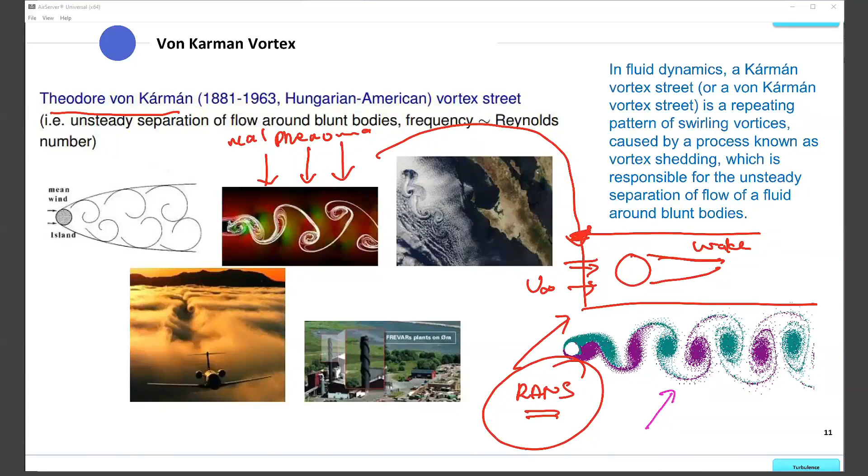I think it's quite interesting to see some quotes here. The first one is from Heisenberg, a German Nobel Prize winner in Physics in 1932. He said, when I meet God, I'm going to ask him two questions: why relativity, and why turbulence. I really believe he will have an answer for the first. Similarly, from Sir Horace Lamb, a British scientist, he said, I am an old man now, and when I die and go to heaven, there are two matters on which I hope for enlightenment: one is quantum electrodynamics, and the other is the turbulent motion of fluids. And about the former, I am rather optimistic.

So you can see here two very well-known scientists highlighted the issues of the difficulty of turbulence. There is no right answer or right explanation to the turbulence behavior up until now. We just try to understand it, and there is still so much to study about turbulence. That's why this lecture is intended to give you some perspective.

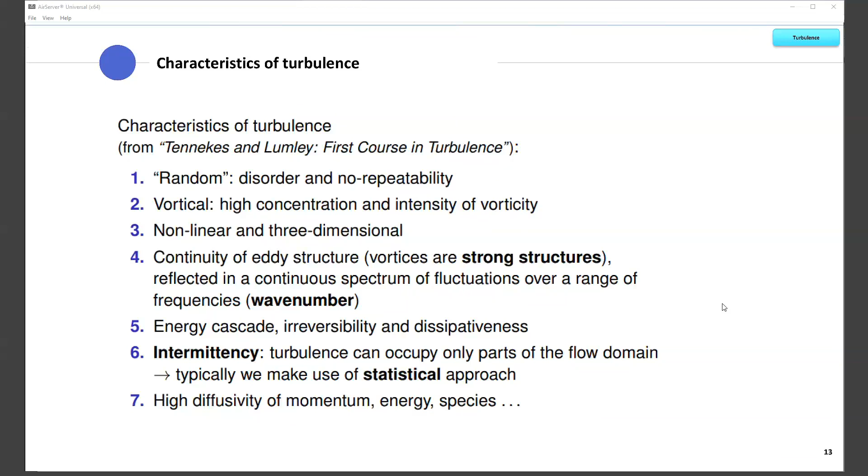For the characteristics of turbulence, there are several terms that I think are quite important for us to understand. First, we need to understand that turbulence is random, meaning that you cannot predict its behavior. It is disordered with no repeatability - it has no set or repeating pattern. So it is random.

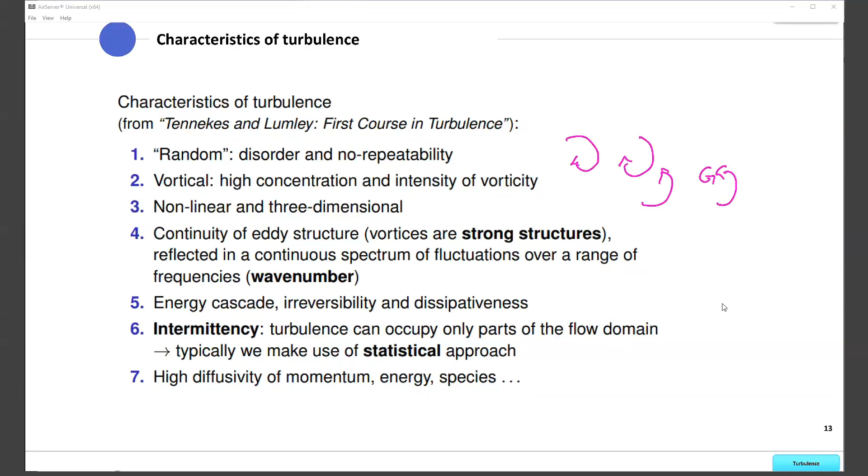Secondly, it is vortical, which is very high in concentration and intensity. What is vortical or vorticity? It is basically the swirling shape, or the swirling movement - these are the vortices, which can be big or small. If you notice, when we first started this lecture, we looked at this example here. You can see once the flow passes through an object, the mixing that happens is in terms of vorticity - the shape of the turbulence will be in terms of the swirling movement. So that's vortex or vorticity, the swirling movement.

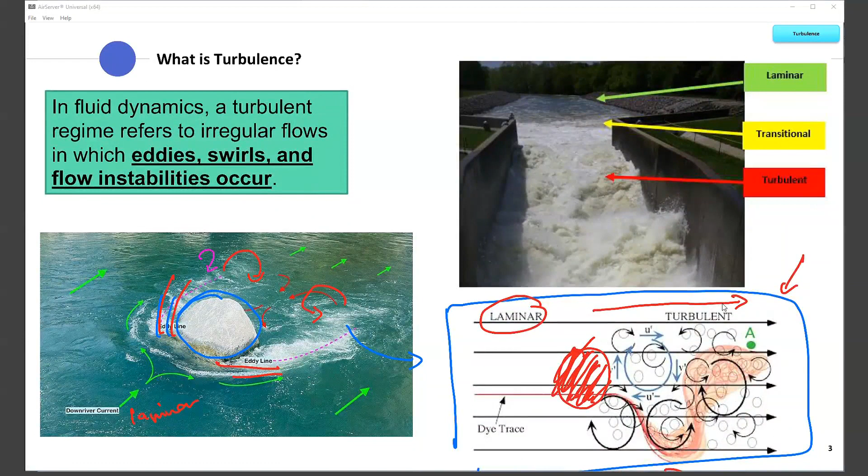It is also non-linear and can be in 3 dimensions. Just imagine, let's say we have position 1 and position 2 - we cannot expect the path of the flow from position 1 to 2 to be a straight line. So it is highly non-linear.

When we're dealing with the flow, you need to remember we are not just dealing with a 2D problem - it is a 3D problem. Meaning that if we look from the front view, remember when we did our labs 1 and 2, we created a domain for our problem, and the domain from the front looks something like this.

Okay, so from the front view we have, let's say this is our x, y, z. So we have x, this is y, this is z. So from here we can see that we have y, over here y, and this is x. That's 2D, but you need to remember...

If we look in great detail, the water column or the depth, we call it water column, can further be divided into several slices or layers. Each layer will have a different movement, or vorticity, the swirling movement, in terms of x, y, and z. So it is highly non-linear and multi-dimensional. It's not just 2D, it's in terms of x, y, and z.

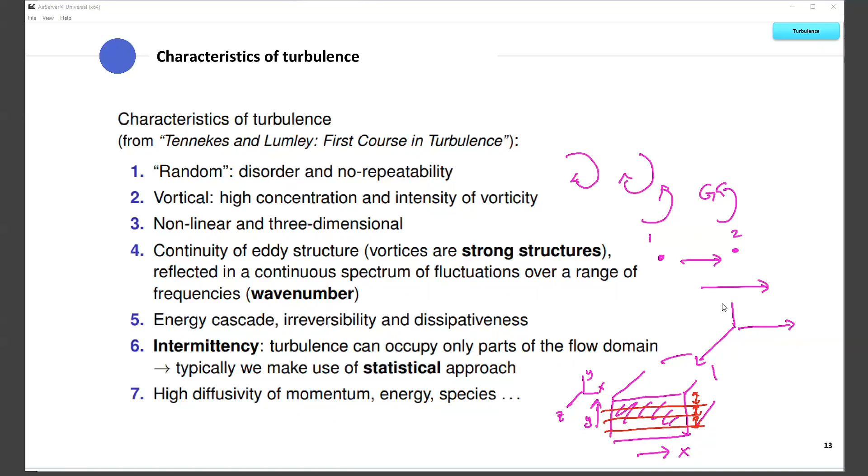And when we talk about turbulence, it also involves energy cascade, which we're going to talk about in a bit, meaning diffusion from large energy into smaller energy. It's about irreversibility too, going back to thermodynamics if you remember - there are things that once done, you can't revert back to the original position. And dissipativeness, meaning the loss of energy. So these are the things we're going to discuss about turbulence.

And then about intermittency, point number 6. Turbulence can occupy only parts of the flow domain. This can relate to, if I can go back to our first slide here.

All right, so if you notice on the figure on the left, the turbulence region - let me color them, let's use black. The turbulence region behind the object has a certain distance to it, meaning the turbulence will not propagate or be maintained over a long period. So this is what we want to discuss.

There will be energy cascades, energy dissipation, meaning the flow, after it passes through the turbulence stage, will recover to its original velocity. So if we have, let's say, 1 meter per second before the object, after a certain distance you will get again 1 meter per second. So this is about intermittency, meaning turbulence only happens at a certain region or location, and after a while it will pass through that stage.

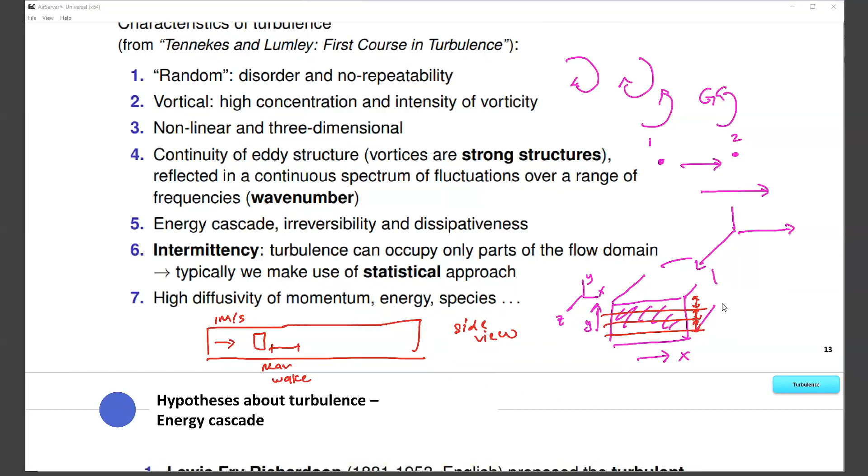So for my work, for example, if we are looking from the side view - this is our domain, and let's say we have our object here, similar to what you did for your second lab. Let's say this is the inflow velocity, 1 meter per second. In the immediate region downstream, behind the device, from here to here, we call this region near wake. How you characterize near wake, how you define it, is usually from literature between 3D to 5D. D here refers to the diameter of the object. So if our object is 1 meter, our distance will be between 3 to 5 meters, categorized as the near wake.

So the near wake is where you will have the highest fluctuation or turbulence. After this region, some of the turbulence will still persist, you will still have the characteristic of the turbulence, the mixing is still happening. So after the near wake, this is what we call the far wake region.

So far, wake region is usually defined as 5D and above. For my case, when I did my research, I was interested to find out how far it takes for the wake to recover. The wake here refers to, if this is our object, the turbulence, basically the mixing behind the device or obstacle. I was interested in finding the far wake, which usually persists from 11D, 15D, or even 20D - it can be meters or kilometers. So this is the far wake, 5D and above.

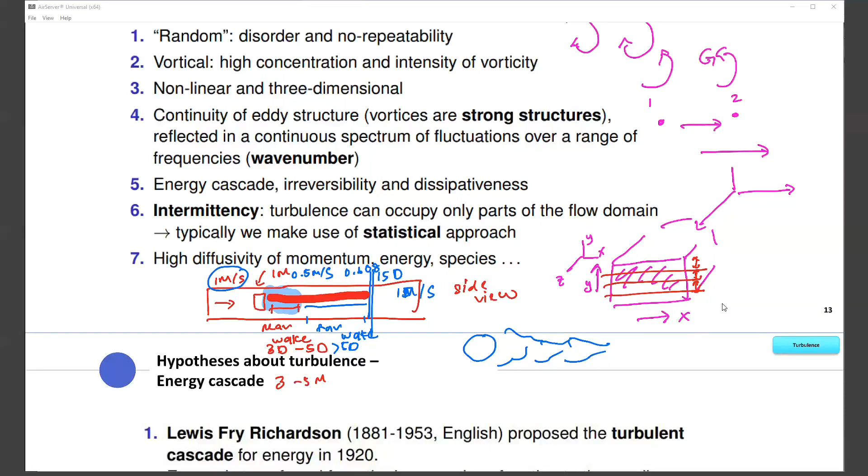So let's learn about the hypothesis. Hypothesis means a proposal made by scientists, how they try to understand turbulence and explain its behavior. The first one is from Richardson, an English scientist. He proposed the turbulent cascade for energy in 1920.

So energy cascade - what does cascade mean? The cascade means a fall down, from a higher region to a lower region, or from something large to a smaller scale. What he's trying to explain is that the energy is transferred from large scale of motion. This is large scale motion, and what is meant by motion, this is the direction of the swirling, the vorticity. The turbulence always behaves in a swirling motion. He proposed that energy is transferred from a large scale of motion to a small scale, meaning it started from a big chunk of motion, and then it gets smaller and smaller by the direction of the arrow.

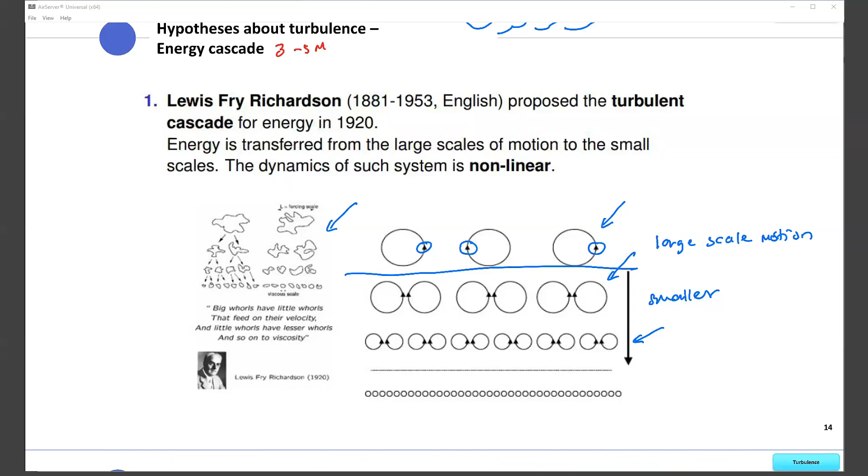Okay, and then the energy cascade. Basically how to explain it in detail. I think the scientist here, Kolmogorov. So again, this is the simplest example I've been discussing with everyone from the first day of class. It's all about a simple object. It doesn't matter the shape of the object, it can be a cylinder, a rectangle, anything. But the characteristic or expected behavior or motion will be the same.

So we have a mean flow, meaning we have u free stream, and then after it passes through the object, this is what we've been talking about. There will be mixing of the fluid or flow behind the object. This is front, and this is downstream of the object. You can see the mixing here - it will be a mix between large scale motion, medium scale motion, and very small motion. It's a mix of everything.

And the transfer of energy, Kolmogorov proposed, looks something like this. It will be from large to small. And he went one step further to explain the transfer from large to small, breaking it into three characteristics.

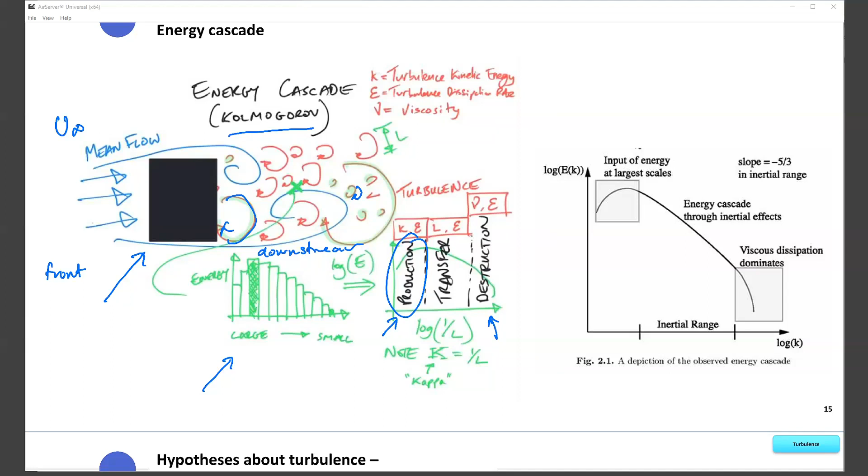And then another hypothesis from Sir Taylor - he hypothesized the frozen turbulence. As the mean flow V advects the eddies, the fundamental properties of the eddies remain unchanged or frozen, since the turbulence fluctuation V prime is much smaller than the mean. So the V here is the mean flow, the mean velocity.

So because he theorized the velocity fluctuation is smaller than the mean, he assumed that the eddies or turbulence can basically be assumed to be frozen or maintained at a certain distance. You can see from this diagram - the eddy before passing through the wind turbine, let's say this is the eddy size. The eddy size before the turbine is just the same as the eddy size after it passes through the turbine. That's what he proposes.

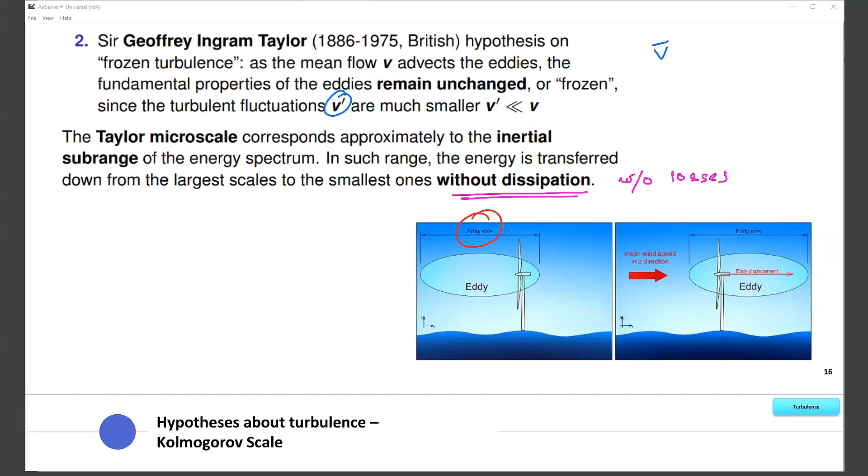The Taylor microscale corresponds approximately to the inertial subrange of the energy spectrum. In such range, the energy is transferred down from the largest scale to the smallest one without dissipation. This is quite different from before, meaning before someone theorized the energy cascaded from large scale energy to smaller scale energy. But now he proposed the energy basically passes through without dissipation - it maintains the range before and after. So this is from Taylor.

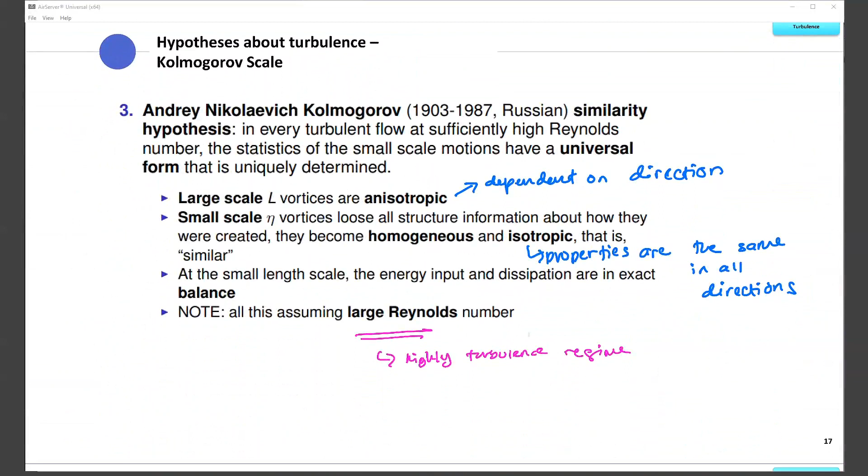Then from Kolmogorov, he's Russian - he said in every turbulent flow at sufficiently high Reynolds number, the statistics of the small scale motions have a universal form that is uniquely determined. Large scale L vortices are anisotropic. So if you draw again our diagram - let's say this is our large scale motion, and it's getting smaller and smaller here, finally a very small motion. So the large scale, on the left, they are anisotropic.

Okay, if you remember anisotropic means dependent on the direction. So, next one: for small scale vortices lose all structure information about how they were created. They become homogeneous and isotropic. Isotropic here means they are the same in all directions, okay, or similar.

And at the small length scale, the energy input and dissipation are in exact balance. Meaning that when we are dealing with the small scale, the energy is being transferred or changed from the large scale into a smaller scale due to the heat dissipation.

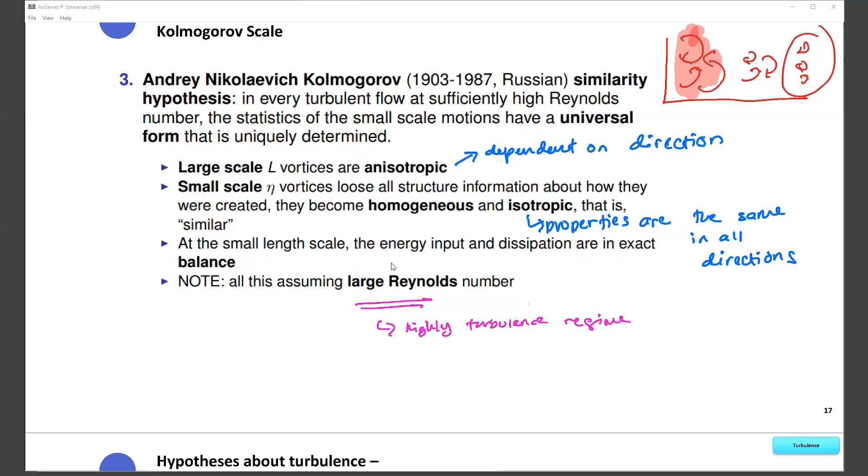And if you notice, all this discussion we had about turbulence mostly involves assuming we are dealing with a very large Reynolds number, when we are dealing with a highly turbulent region, because the name itself is turbulence modeling or turbulence problem. This problem will not exist for laminar flow because laminar is a very smooth flow. You don't have all this mixing. So when we talk about turbulence, we always assume we are dealing with a very high or large Reynolds number. So we talk about this from production to transfer to destruction.

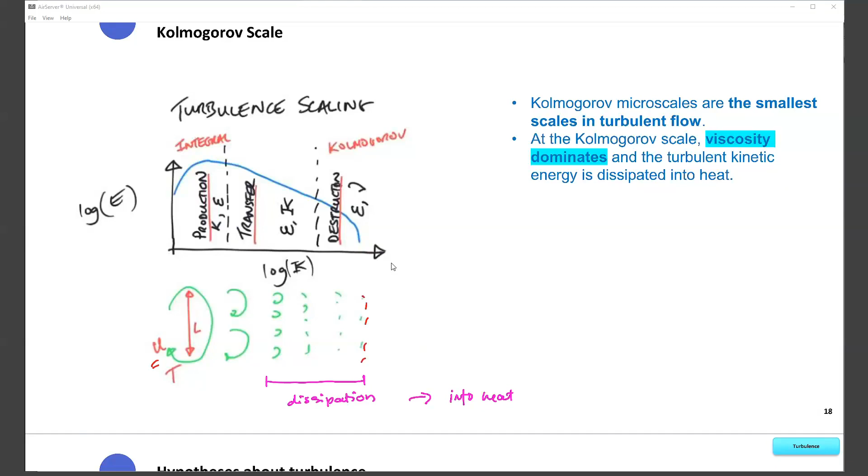We're not going into details of the turbulence equations, but if we want to understand a bit better, when we look at the Kolmogorov scale, what he proposed is this plot from production to destruction. At the large scale, you have the velocity u, and we have L. L here refers to the length or the size of the turbulence or the vorticity. And then as we go on until the smaller scale, energy is being dissipated, meaning it transfers from highly kinetic energy into a less kinetic energy region due to dissipation of energy. So kinetic energy is being transformed into heat energy.

Right, so that covers this. Okay, what do we know for sure? This is interesting. If you notice, most of the hypotheses or turbulence concepts that we've covered or use up until now are based on assumptions formulated in the early 30s or 40s. So what, 80 years now? These hypotheses are made on the basis of logic and dimensional analysis of the flow.

And yet we also look for the rigorous or mathematical proof. Meaning that most of them propose the hypothesis based on either experimental or analytical calculations, but they are also basically based on logic. And then, of course, in many cases there is extensive experimental evidence that they are correct. So meaning that what has been proposed 70, 80 years ago is still being used up until today, meaning that no one is disputing what they have proposed.

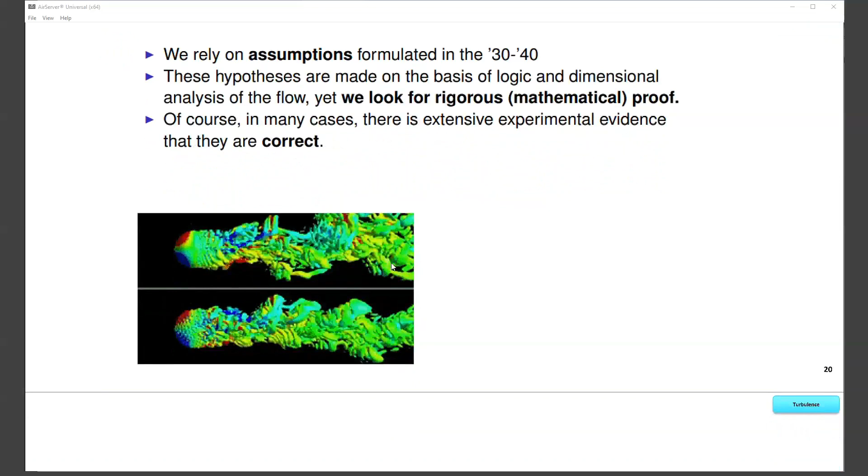So the problems we look at again, if you remember about the golf ball dimples, that has been proposed long ago, and yet up until today that observation still stands. It doesn't change. Okay, so that's a bit about turbulence.

Now let's move a bit into the modeling part, the reason why we need to model turbulence. We can numerically simulate inviscid flows — if you remember, inviscid refers to the Euler equations — or laminar flows using directly the governing equations that we derived. However, despite the performance of supercomputers, turbulent flow represents a significant problem.

Why? The first point: the direct simulation of the governing Navier-Stokes equations, called DNS, direct simulation. DNS here stands for direct numerical simulation. So we can use this first method, DNS.

It is only possible for simple cases that use low Reynolds number. I'll explain later. What does it mean by DNS? It can be shown that the number of mesh points scales as Reynolds to the power 9/4, while realistic applications have a Reynolds number of 10 to the power of 6 or 10 to the power of 9, meaning that in normal applications we are dealing with a very highly turbulent region. We are not dealing with something that is very low Reynolds number. In most applications in daily life — car aerodynamics, jets, spaceships — we are all dealing with a highly turbulent region.

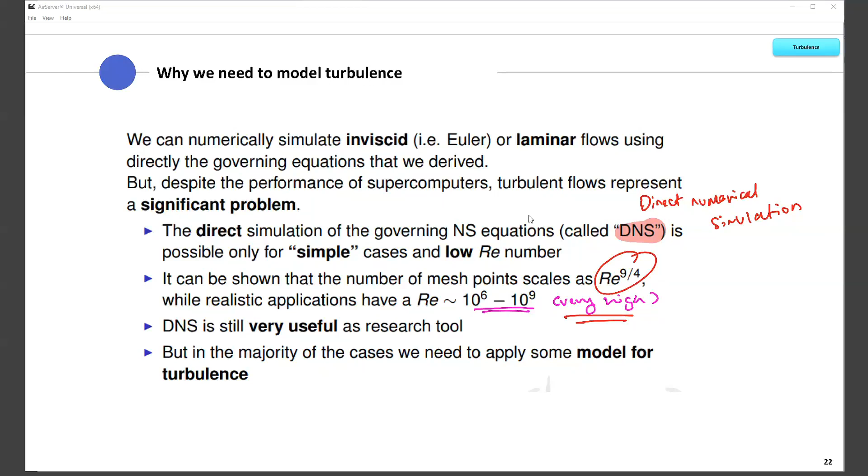Okay, so now in detail, what is DNS? When we are using the DNS approach or DNS method, we are not modeling the turbulence, meaning that we are solving the turbulence characteristic as it happens in the problem or project that we have.

So it's regarded as an analytic solution to the Navier-Stokes equation. It solves all scales of motion. Previously we looked at the Kolmogorov scale - we have large scale motion and small scale motion. So when using DNS, we are basically solving all the scales from the large motion up until the small motion. We are not modeling anything.

But the drawback is it is extremely costly, and the cost here refers to computational cost. It is only used for scientific purposes, for example to validate turbulence models, for fundamental understanding, and more importantly it is limited to very simple cases. You're highly unlikely to find research that uses DNS to solve, for example, car aerodynamics or aerodynamics of a jet, because it is extremely costly in terms of computational cost.

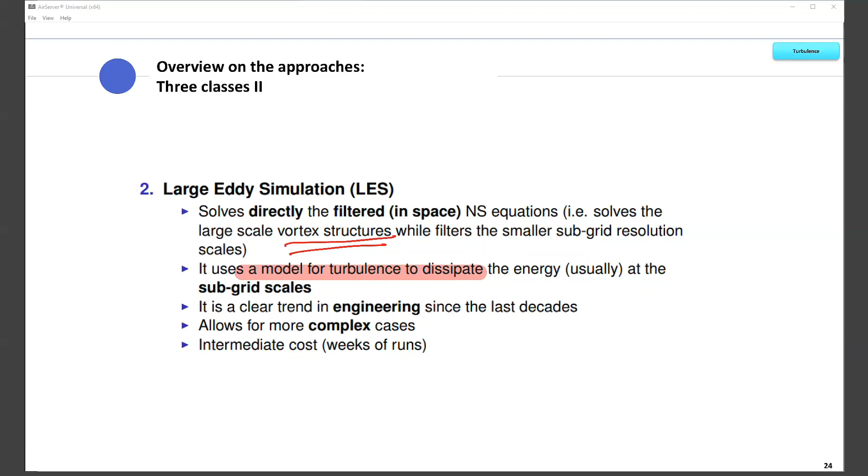The differences between LES, DNS, and RANS, in terms of the running time. So far we understand that for LES, it can solve most of the structures, and the smaller ones use a subgrid resolution where some sort of turbulence modeling is still needed, to solve for very, very small vortex structures. This is the trend nowadays, LES. And in terms of cost, it is less than what we had for DNS.

The last approach is what we call RANS, Reynolds Average Navier-Stokes. This method basically uses the decomposition of variables into two main variables. So when we're dealing with, say, v, the velocity in the y direction, instead of just solving for the right value of v, it consists of two decompositions: the mean, v bar, plus v prime. Prime here refers to the fluctuation. So the mean takes the mean value of the velocity in that direction, and then the fluctuation is the difference between the real value at that point against the mean value. That's how they get the fluctuation.

Then a time averaging is operated, and we have two additional terms in the Navier-Stokes equations. More importantly, the dissipation due to turbulence is entirely modeled, meaning that starting from the large vortexes into the smallest vortexes, all of them are being modeled instead of being solved.

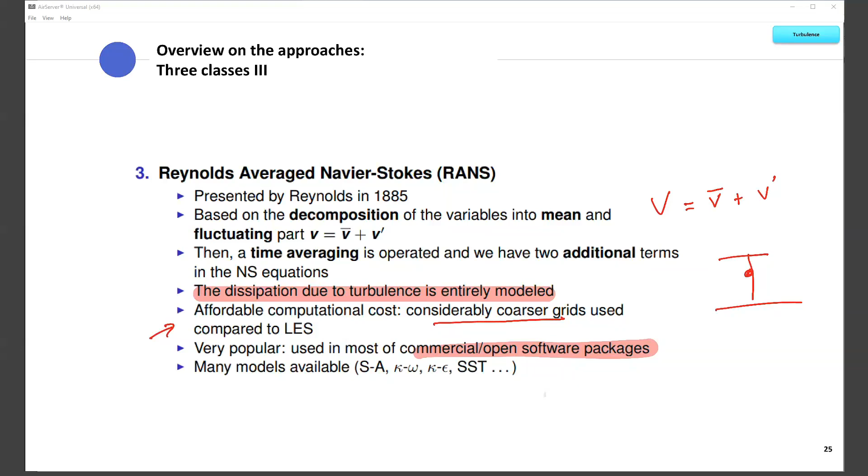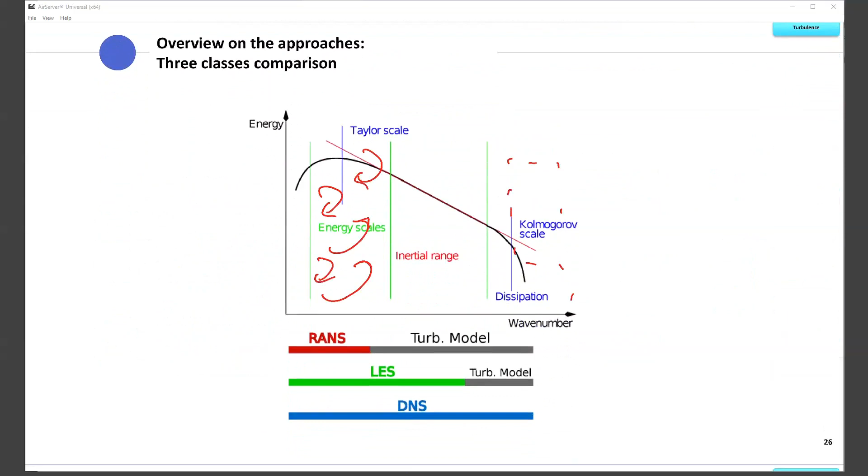If we go back to the Kolmogorov plot, this is the largest energy scale, the largest vortexes, then there's a transition in the middle, and the smallest ones are on the right side. If you use RANS, it can solve the largest scale or largest vortex structure, meaning this part. So that's RANS. The rest, from medium to smallest, all the structures are being modeled, meaning the turbulence model helps the simulation replicate the behavior of the flow. It's being modeled, not solved.

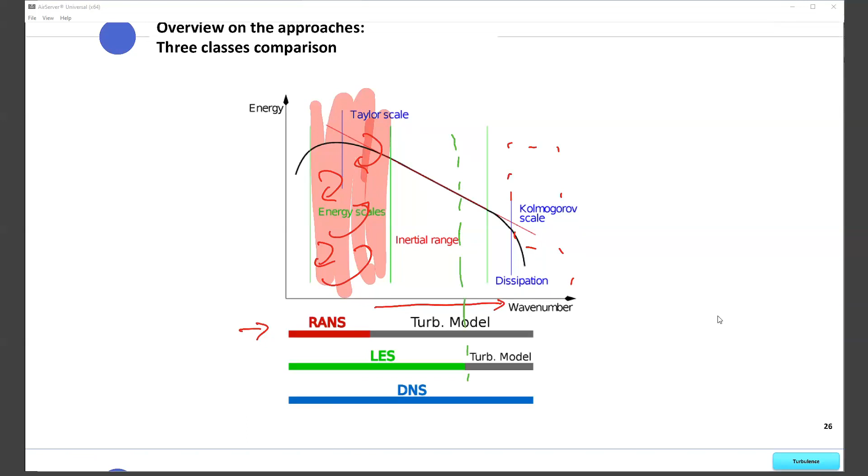Now for LES, it can solve most of the range of sizes of the structure, roughly up until here. So this is roughly the region where LES is significant, meaning it can solve most of the range, except for the very, very small one on the right side. There, at the subgrid resolution, some sort of model needs to be introduced to solve the small scale. For DNS, it can solve all structures.

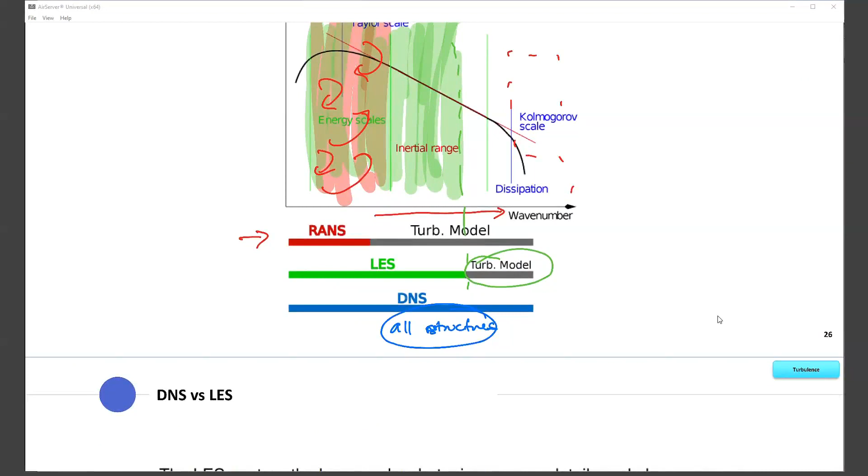Okay, so that's DNS. But remember, it comes with the drawback where you can only use it for very simple problems. Usually right now when we're dealing with real applications, it's almost impossible to use DNS because it consumes too much time, and you cannot solve in detail. Of course DNS can be used to solve detailed problems, but if you want to solve what is happening at, for example, a fighter jet's aerodynamics, then it will take forever to solve each individual turbulence or the vortexes happening in the aerodynamics.

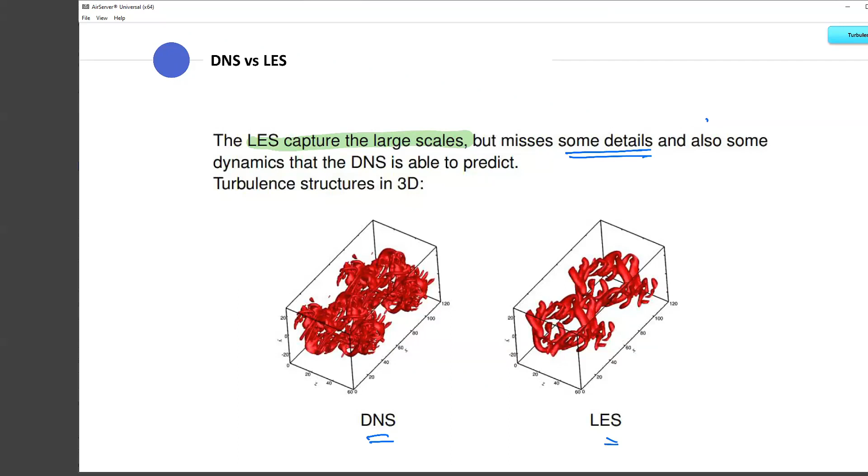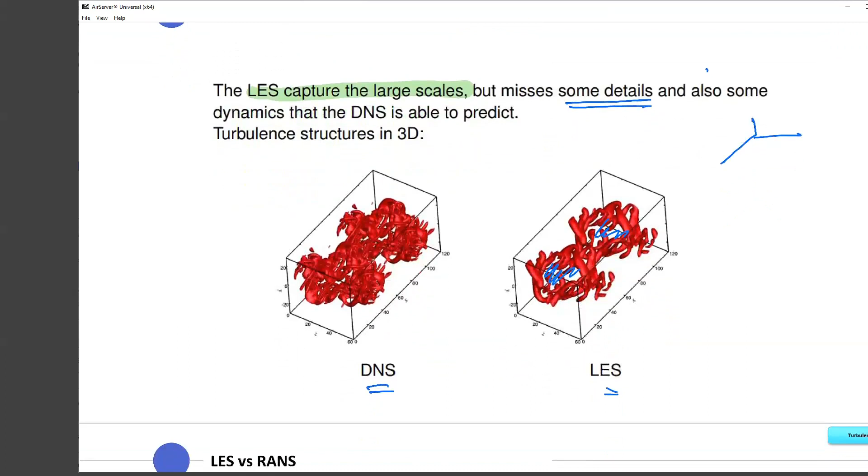So here are some simple examples to give you some perspective on the difference between DNS and LES. LES captures the large scales but misses some details, just very small details. So you can see here, DNS can solve all the vortexes, all the turbulence, all the mixing that is happening. But LES, even though you can see the shape of the turbulence, it's not full, it's missing some of the structures. This is in 3D. As I mentioned previously, when dealing with turbulence, it's not just 2D, we're dealing with both X, Y, and Z. So this is a very good example to show you DNS and LES.

Okay, to give you a better perspective, let's watch some videos of simulations done by one of my colleagues at the University of Edinburgh when I was a student there. Just give me one second, let's stop.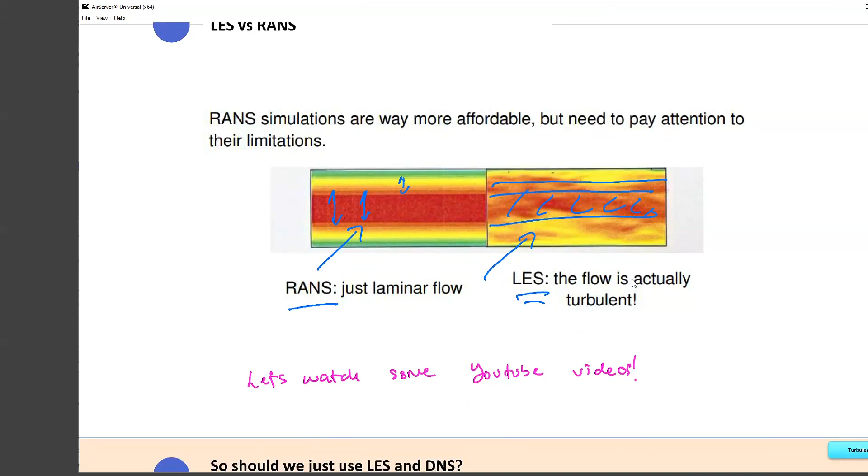Okay, this is a simulation, of course. Let's have a look. Okay, it doesn't have sound. This is a simulation basically for the Sound of Islay. Sound in Scottish basically is just a strait, like a selat. This is done by Dr. Angus Creech, one of the researchers at University of Edinburgh. He's trying to simulate the hydrodynamics happening in between these straits at this particular location, because this location has been identified as a potential site to deploy tidal turbines. Before the company can invest or put the tidal turbines straight away, we need to understand first the right locations where we can put the turbines, the directions, how many turbines, the optimal number, and the arrangement. So there's a lot of consideration. Before we can do all that, it's better for us to get some understanding of what's happening by simulation. This is done using LES, large eddy simulation method, using a software called Fluidity. I'm going to play the video now.

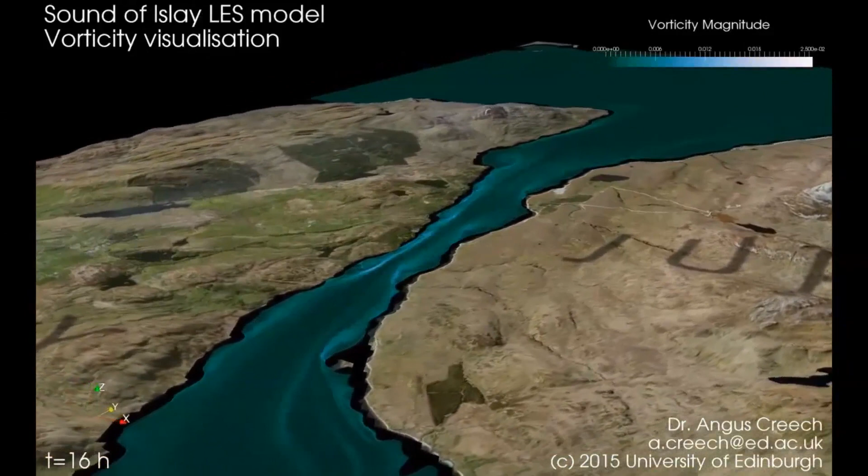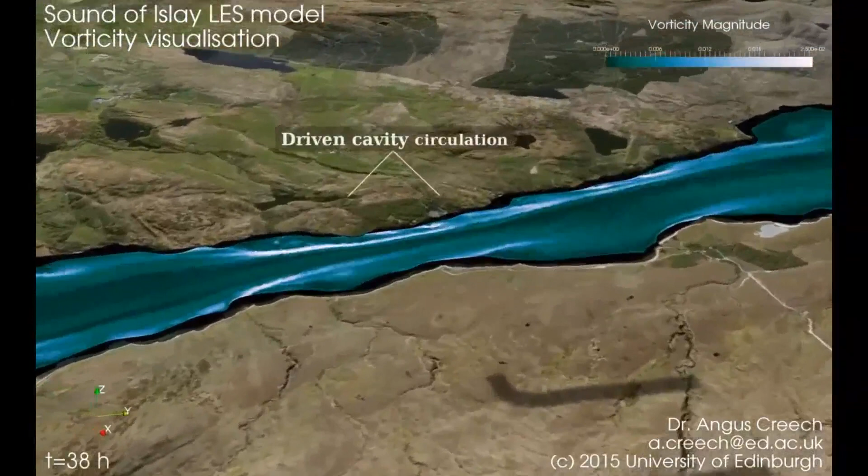So this is basically a simulation that shows what is happening at a certain location and also at a certain period of time. These researchers need to have the correct input at the boundary, the data of the tidal conditions, what is happening at this particular time, how many tidal constituents are observed. So you can see here, we can see all the vortex shedding. The flow is going to the right and then suddenly going to the left.

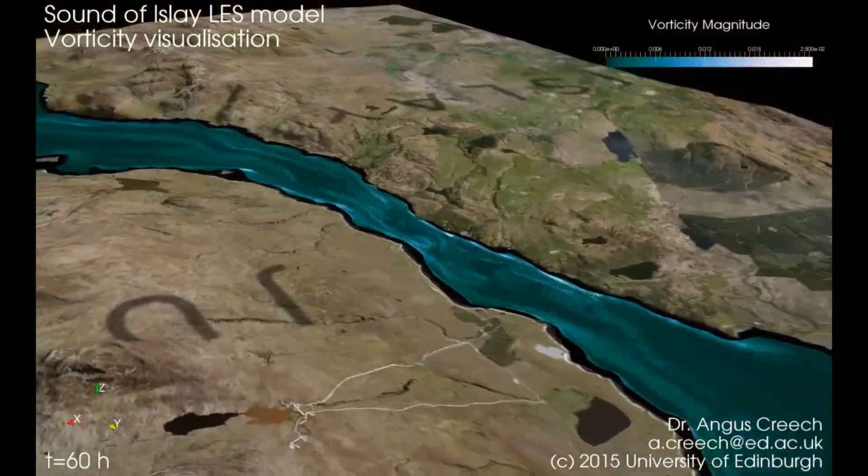That's because of the tide, the change of tide—the rise and ebb of the tide. You can see that the flow first is going to the left and then suddenly it changes direction because the tide changes. Now it's going to the right.

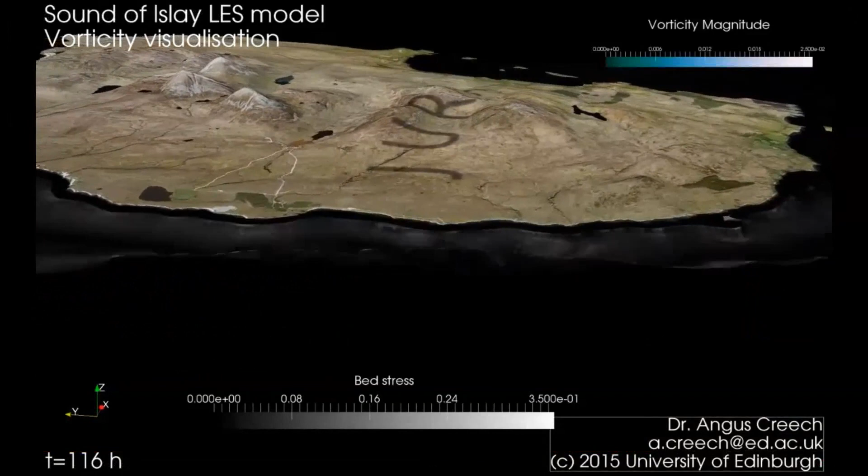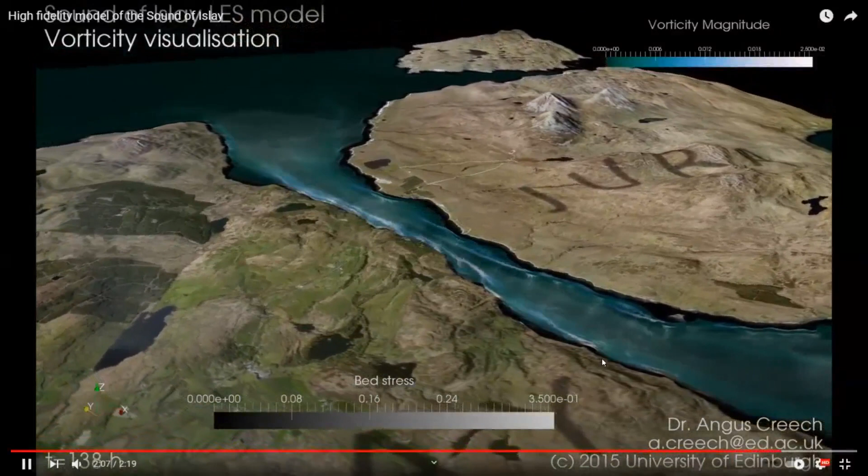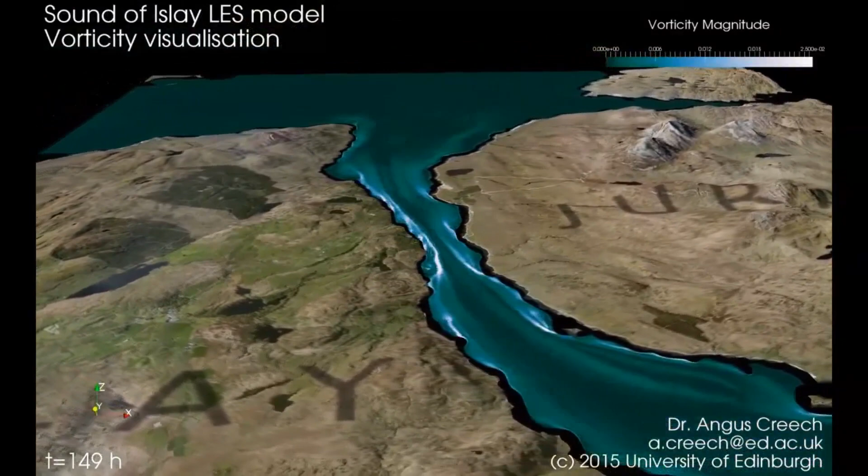So non-hydrostatic, meaning that the flow is being calculated in terms of X, Y, and Z. Now they are showing the bed stress with surface vorticity. What this means is, instead of just looking at the topography of the islands, we also need to consider the shape of the bottom of the location.

Just imagine, let's have a look again—the mixing happens maybe a few hundred meters or even kilometers after the island. That's important because we need to understand where to put the device, for example in this case, the tidal turbine.

This is the behavior that we are observing—see all the vortex mixing over here at the back, the flow coming from the right and left, and where they meet, and how it propagates until the end.

Remember, all this simulation is useless unless we put the correct boundary for our work, unless we are using the correct topography—meaning the islands, the geography, the coastline, is extracted correctly from the source. His simulation depends on several factors, not just putting some value and getting the output. It depends on several factors which definitely have influence on the output of his simulation.

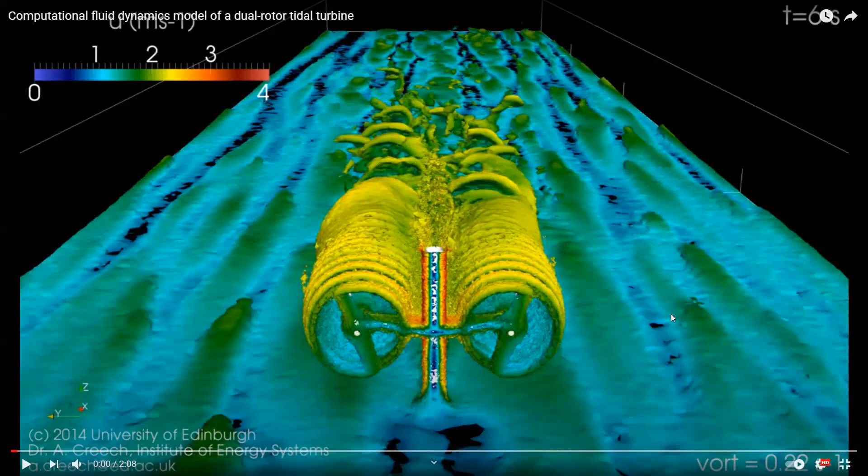Let's go, we got one more again from the same person, Angus Creech. This is a simulation of a tidal turbine that shows the vortex shedding, the turbulence behind the turbine in real 3D. Again, he's using LES. You can see over here.

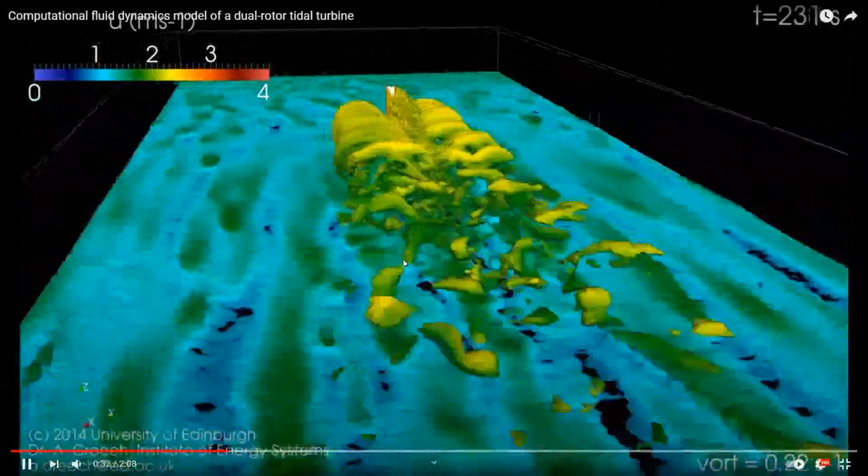As the blades are rotating, you can see that the wake is generated behind the device. The wake, the turbulence, propagates or persists for several meters, hundreds of meters behind the device. So this is a very detailed simulation showing the behavior of the flow behind one device.

Why is this simulation important? Like wind turbines, when dealing with tidal turbines or devices, we are not just going to put one or two devices at a certain location and extract energy, because it won't be sufficient. We need a few devices, or a farm—a combination of several devices in an array where we put them and extract energy.

By looking at these two rotor, two-blade turbines, we can see that the wake persists up until a certain distance. So now we can understand what is the optimal distance for us to put a device behind the first turbine or the first device.

Because if we put the device too close to one another, the device at the back will extract less energy, because at the back the wake is still recovering, so the velocity will be less. Less velocity means less energy can be extracted. That's the importance of research like this.

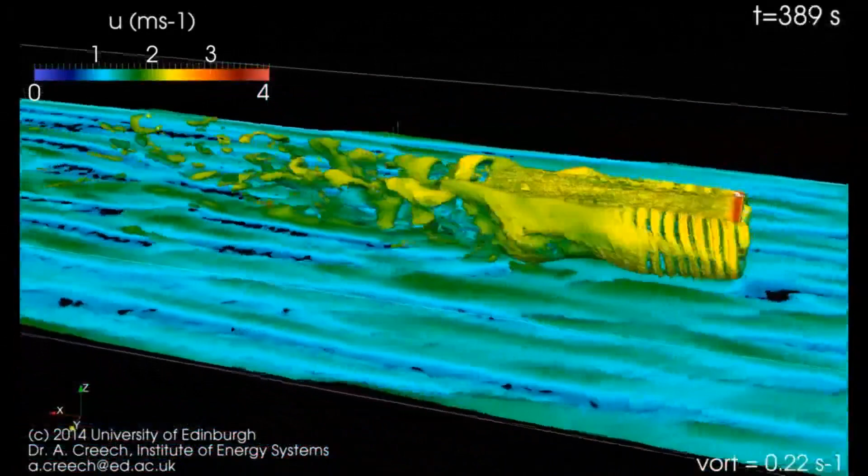Once we understand what is happening, then we can make judgments—how many turbines do we need, what are the optimal arrangements we can use. Otherwise you invest, let's say, 100 million pounds, and then the energy extracted from this location is just maybe 100 or 200 kilowatts, which is not enough to justify your investment. You can see here the wake generated by the blades as well as the structure.

Okay, the structure plays a very important role as well. So you can see over here, for example, are we going to put our device right around here? If we put our device right behind the turbine, the velocity is still recovering, so we are not going to get optimal energy extraction. Maybe we have to put our device somewhere on the side here - it's called a staggered arrangement. So this is the importance of research like this.

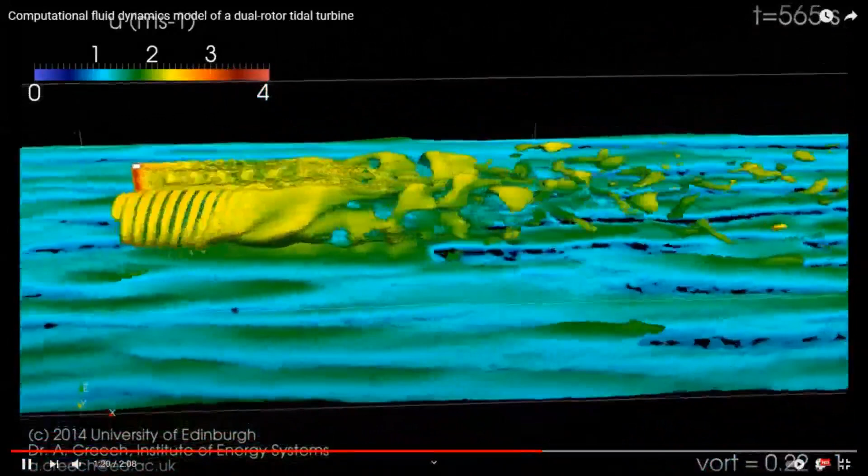Okay, right, so I think they are just showing. Okay, so I'm going to stop now. All right, so let's go back. Okay.

All right, so just now, before we watch the video, we discussed about computational resource here, computational cost. Now, how long does it take to simulate something like what we just watched just now?

The research done by Angus Creech - I had the chance to talk with him. He showed me his results, and we discussed first how it was done, and second, how long does it take. For the simulation on the Isle of Islay, where he's trying to investigate the hydrodynamic behavior between the two coastlines. If you remember the first video that we watched,

it was done by using Fluidity. This is a software, open source. Open source software named Fluidity.

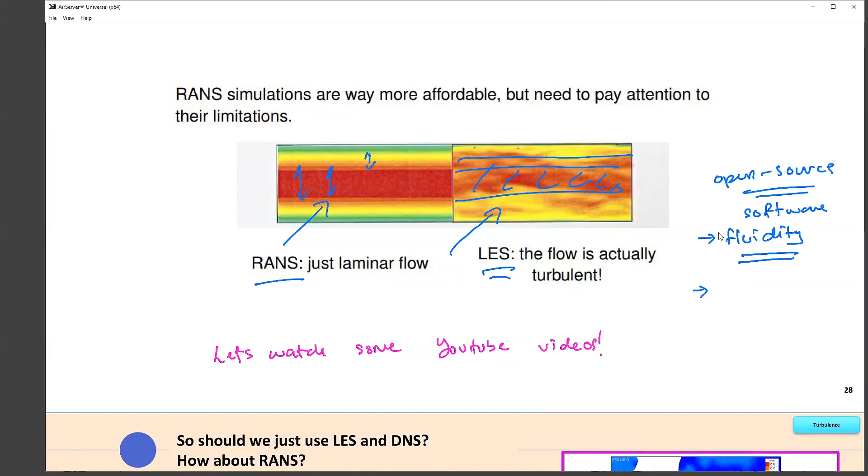That simulation took him 30 days to complete by using a supercomputer. He used the LES method. So just to give you perspective, to get some result like that, just a short amount - I think the first video was not even 2 minutes - to get a 2 minutes data or output, as accurate as that using LES method, it took him

30 days to simulate by using a supercomputer. So just imagine how long does it take if you want to simulate a jet, for example, if NASA wants to investigate the aerodynamics of their spaceship. Just imagine the computational cost involved in this type of simulation.

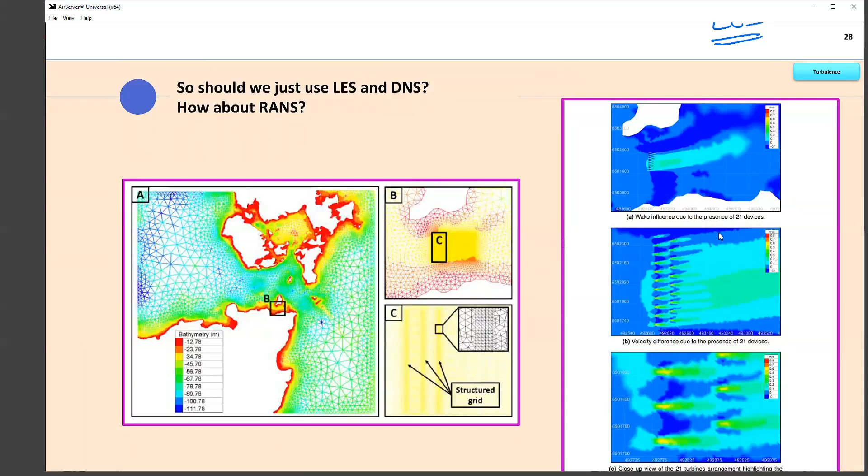So I'll give you one simple example - this is my research for my PhD. I use open source software, I mentioned this before, I use Telemac, and Telemac basically uses RANS. So now why do I use a software that basically utilizes the RANS method instead of LES?

In my case, I just want to investigate - basically, if I put a tidal turbine at a certain location, what will be the impact, the wake flow? How far will the wake travel? Will it impact or alter the environment in the nearby region? So I'm not interested in looking at the detail of what is happening at that particular specific site.

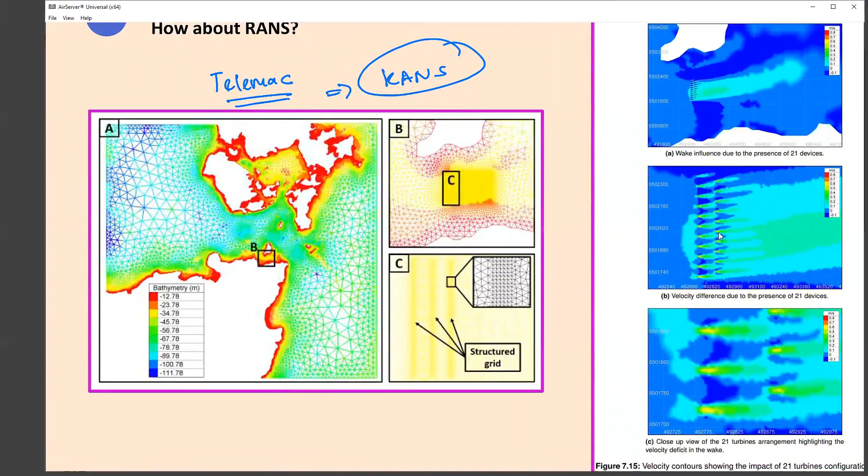No, so for example, I've shown you this before in the lecture - this is my domain in 2D. My location here is zoomed in, part B here, and C here - this is where I put my device, and this is a mix of structured and unstructured grid, you can see over here. This is my result on the right side. Now, just remember this is the island, the small island here.

Here, you can see that if I use this device, the wake will propagate or go up until kilometers behind the site or the farm. And if I zoom in, you can see the velocity deficit.

In this case, I arrange my device to be staggered so that no device is directly behind the first device. And when you see it here, the flow, the wake generated from the device is not symmetric. Why is it not symmetric?

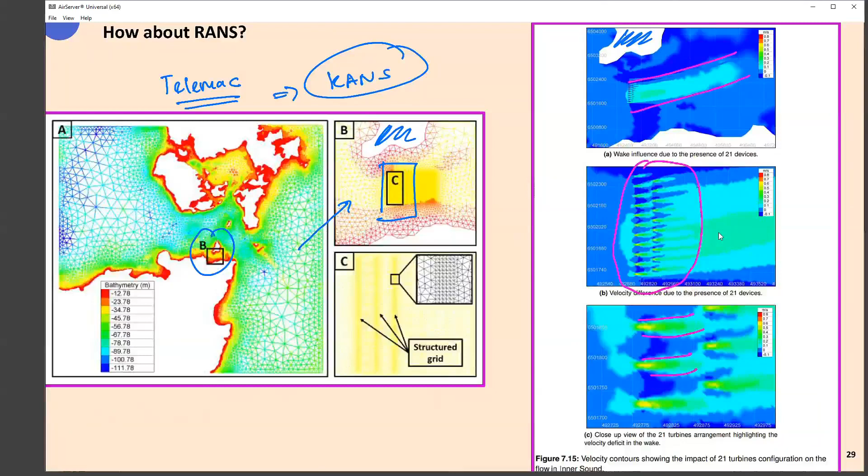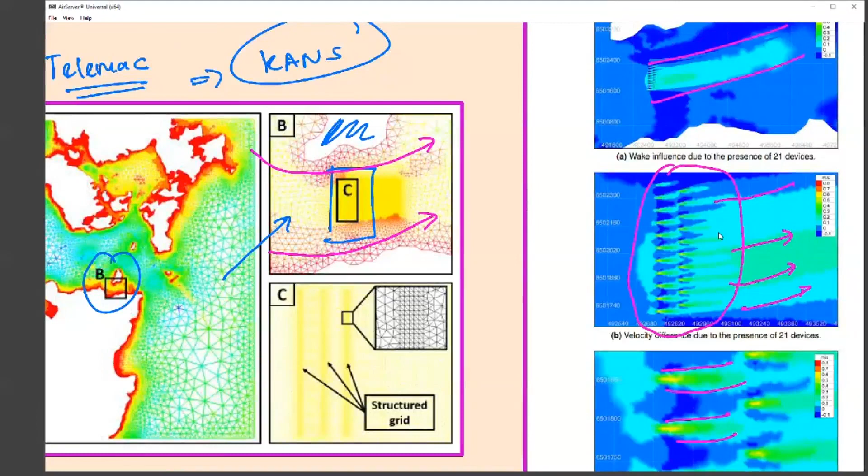Because this uses the real tidal data. And if you can see here, the shape of the coastline basically resembles something like this. Meaning that the flow coming from the left side of the domain travels through this channel, and then passes through the right side. Basically there's a kind of lane, so it's not a straight line. That's why you see the wake basically going in this direction. So that's one way for you to check whether your simulation is correct, because it's replicating the right physics.

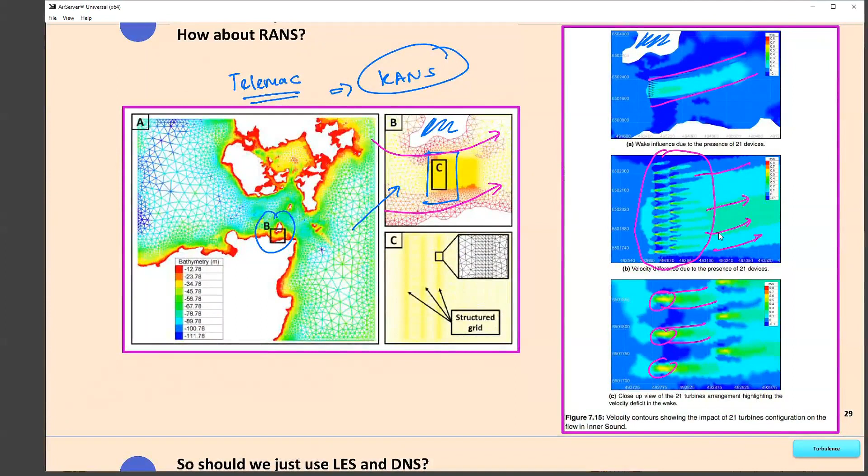So similarly, this is the detailed view of the device. It depends on what you are trying to do. For most cases, RANS should be sufficient, unless you are dealing with something very specific where you want to check the turbulence shape of a certain thing, then you go for LES.

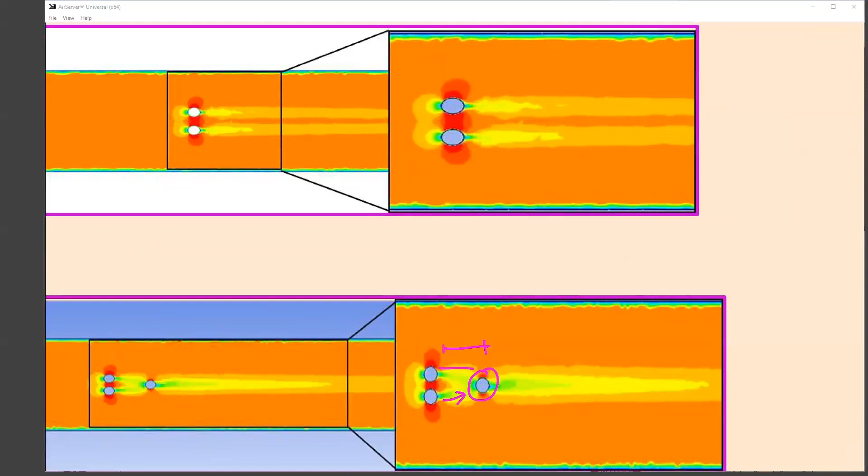Similarly, this is from my FYP work with my students. You can see the influence of arrangement if we use two devices and three devices. For example, if you put this device at a certain location, you can see that the wake interacts, so it will impact the output generated or output energy extracted by this device, the third device.

So in this case, RANS should suffice instead of LES, because we are not interested to see what is happening behind in detail. We just want to see the interaction of the wake. So it depends on the applications.

But there are some drawbacks to using RANS, because if you remember, RANS cannot solve the smallest structures. It has to be modeled. So if you notice here, I zoom in over here.

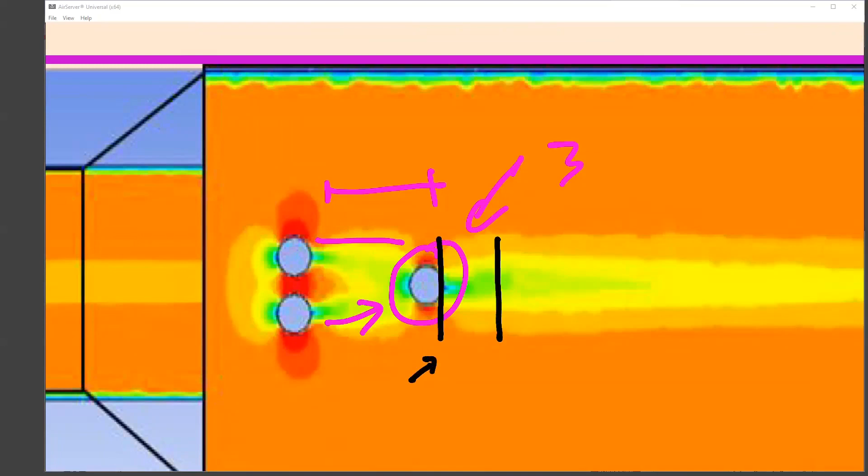Remember the definition of near wake that we discussed. In the near wake, this is the region where the mixing happens the most. Because the mixing happens the most, it has a combination of large, small, and medium scale structures. And because RANS takes the average value, the structures or behavior of the fluids in this region cannot be replicated accurately. So the near wake region basically cannot be used for analysis using RANS. That's one of the limitations.

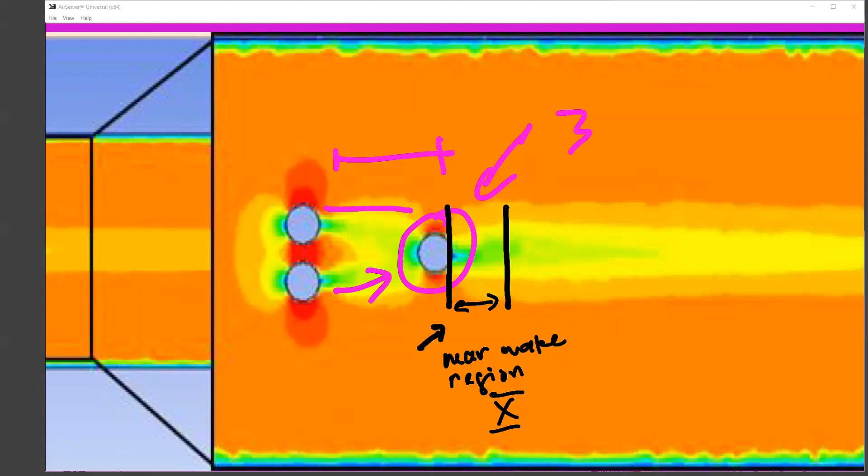So we have to understand the pros and cons of each method before we proceed. So we talk about RANS - basically it's about the combination of the mean value plus fluctuation of the velocity component.

Into details - several modeling models are available for RANS. In ANSYS, for example, we have Spalart-Allmaras, but that's a one equation model.

So basically, one equation model is something that we try to avoid if possible. 10 years ago, 15 years ago, maybe people still used one equation models because of the computational resources. It's a good compromise, it's quite okay, but most people used them back in the days because of the limitation of computational resources. But right now, even on a laptop, a high performance gaming laptop for example, you can have RAM up until 32 gigabytes, not storage, just for RAM. And then you have SSD for storage. So you have basically more resources to do the computation.

So that's why nowadays, most simulations use the two equation models. For RANS, two equation models basically are more accurate. They can give better simulation values, or the values that we want. So the most commonly used one, as you know, is K epsilon.

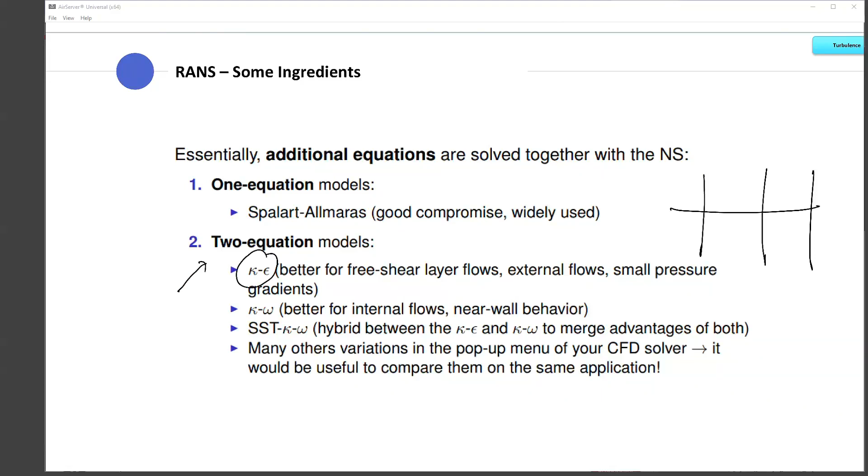Okay, so for all these K epsilon, K omega models, before you use them, you need to understand the positive and negative, meaning the strengths and weaknesses of each equation. For example, when dealing with free shear layer flows, external flows, small pressure gradients, meaning general problems, you use K epsilon.

But when you are dealing with near wall behavior, meaning from side view, instead of your object in the middle of the domain, it's located at the bottom, that's where you deal with near wall problems. So for near wall, K omega is better because it solves better near the small fluctuations at the wall. So you have to understand the pros and cons of each of these models before you use them.

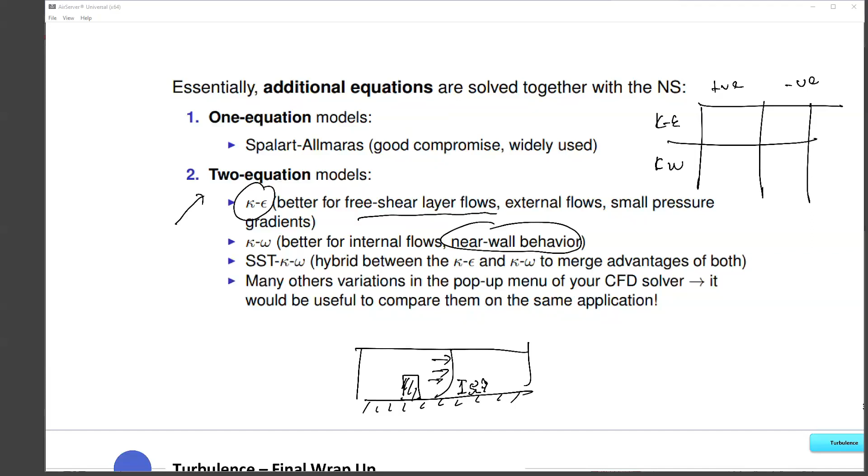Okay, so to wrap up, for one equation models, this is what's available in ANSYS by the way. One equation models for me is something you can just ignore for now, because I think most hardware right now should be able to run the two equation models. So for two equation models, these are RANS-based models.

You have standard K epsilon, RNG realizable, standard K omega, SST K omega, and Reynolds stress model. Again, as I said, please make sure you understand the strengths and weaknesses of each turbulence closure model, the TCM. The turbulence model is also called the turbulence closure model. You need to understand all of them.

And then let me make some remarks here. These are all available in Fluent, CFX, or Star CD, which is one of the commercial software. I used this software once, but it's not user friendly enough to say. So for ANSYS students, we also have the option to use LES in ANSYS, which is interesting. So if you are dealing with something that requires detailed flow characterization, then we can try to use LES in ANSYS.

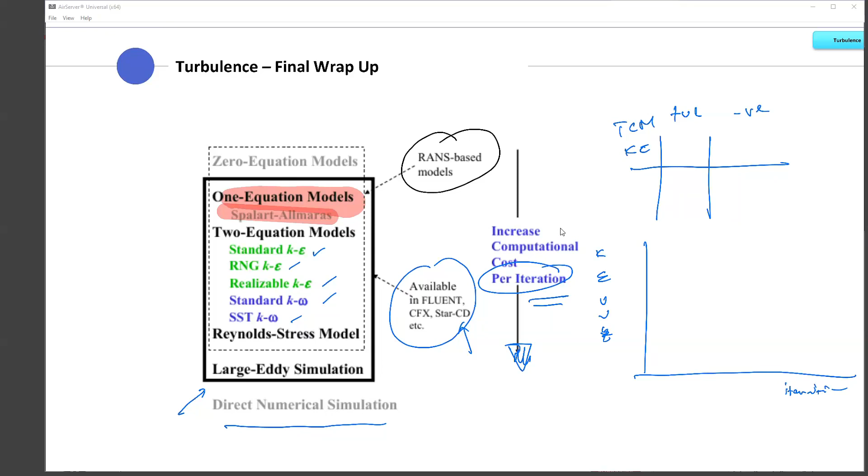This is per iteration, just remember. Remember for ANSYS, when you did your lab and case study, you have all these K, epsilon, and U, V, W, the velocity components, and then you have this iteration. This is from your residual plot, yes, residual plots. So this is per iteration.

Remember when you set, let's say, 10 iterations, 100 iterations, or even 1000 iterations, so per iteration, the cost involved that we're talking about is per iteration. So just imagine if you have 1000 iterations and you are using DNS, just imagine the resources it needs. Okay, so just again, a bit on turbulence modeling.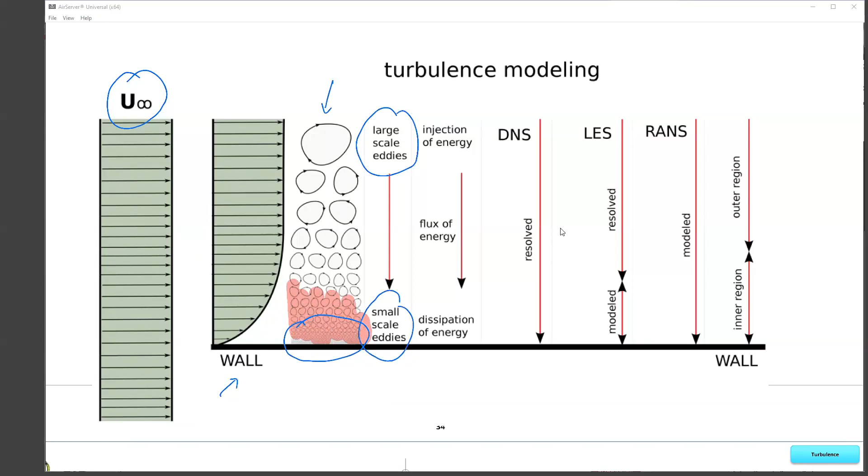So the mixing that is happening at the bottom of the wall, the largest energy here, and then as it goes down it becomes smaller and smaller. So we have large eddy scales, and small eddy scales at the bottom. Injection of energy, remember Kolmogorov, we have production or injection of energy where the energy is largest, and flux of energy means the transfer of energy. The dissipation of energy is due to heat, converted from the mixing which basically generates heat, so it loses energy, changing from one form to another.

So if we use the DNS method, it will resolve all the scales, from the large until the small. For LES, most of the scales are resolved, but the smallest ones at the bottom are modeled, from the largest until the smallest. Okay, so I think this is a very good explanation in terms of turbulence modeling, what does it mean by turbulence modeling.

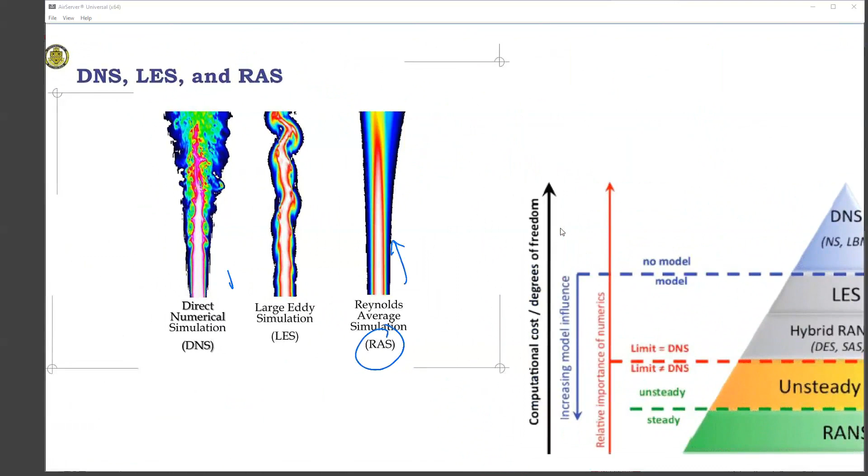Okay, so as you can see over here, some difference in terms of DNS, LES, and RANS. This is the same simulation but using different methods. You can see that when you're using RANS, the value is uniform, as expected. Using LES, we can see some fluctuation, but in the fluctuation there is more detailed behavior, like the one shown here, DNS.

So again, as we go from RANS to DNS at the top, we increase the computational cost. We get detailed output, of course, but we have the drawbacks, as mentioned. The resources needed is large.

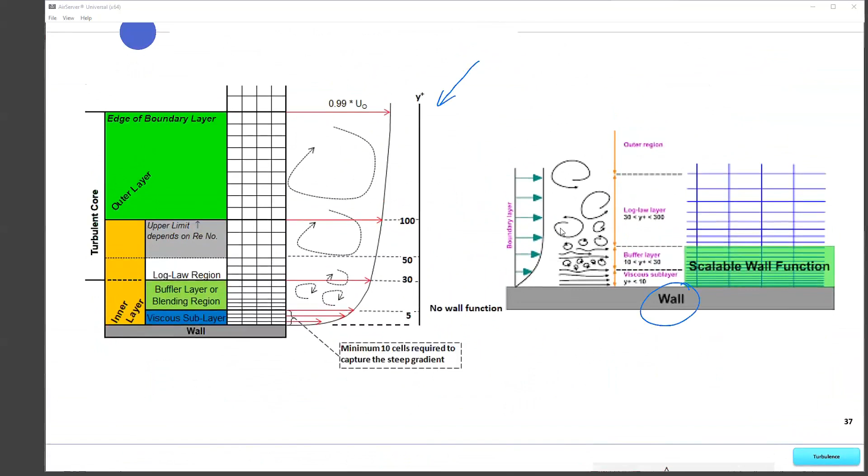So similarly, this is what we looked at before, it's quite similar. What is important about this diagram is that, apart from the turbulence model, we also have another one that is called wall function. Basically, when we try to resolve the small scale, we need our mesh or elements to be small as well, so that we can capture what is happening at that particular location. But sometimes using too small elements is not preferable, or it's not possible.

So there is another method called wall function, Y plus, that can be introduced to substitute for the turbulence model. This is not part of our course, but I'm just throwing out the idea so you can understand there are several methods to replicate the behavior of the small vortices or small structures, eddies. That's why we call it a wall function.

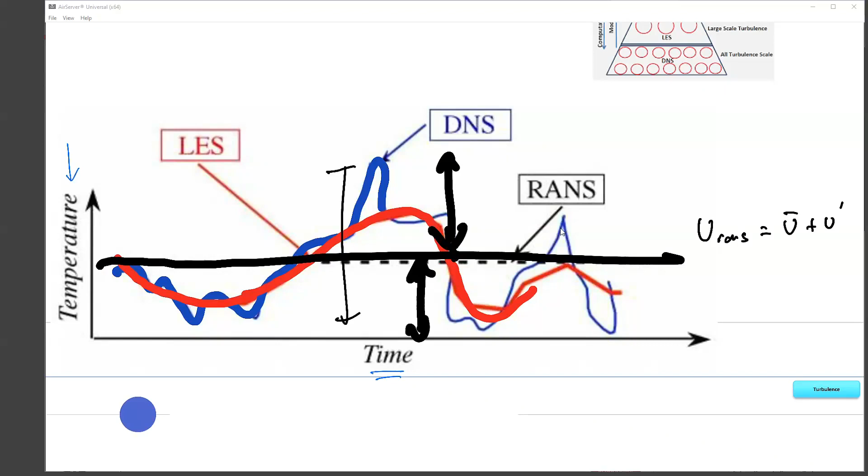RANS, on the other hand, is the simplest. Instead of worrying about the fluctuation, instead of following the trend, it's just a straight line. They take the value of the average. So that's what it meant just now for RANS, for U RANS. Basically, it's just U mean plus U fluctuation. Mean, this is the mean. Fluctuation is what is the value, for example, over here. The fluctuation is the difference between the mean and the exact value, in this case DNS. So that's what RANS refers to.

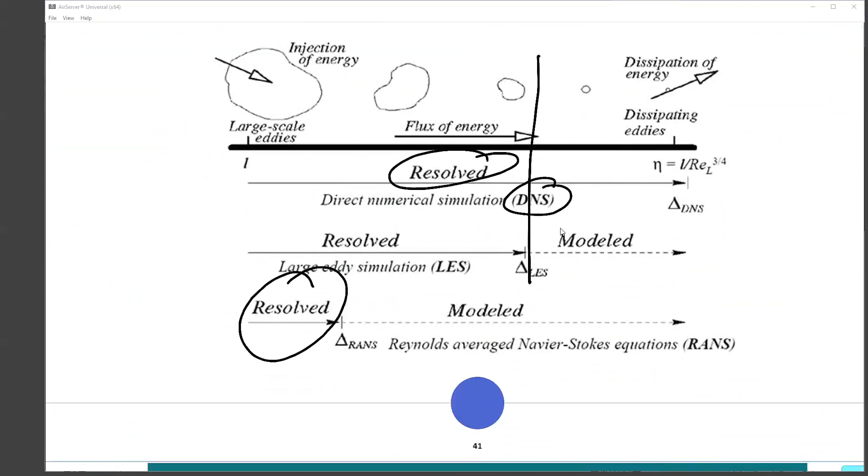Again, this is what we discussed about RANS, very useful for us to understand. We looked at this before. If you are dealing with DNS, everything from the large scale eddies into the small scale is being resolved. For LES, most of them, but for RANS, it can only resolve or solve for the large scale eddies, injection of eddies.

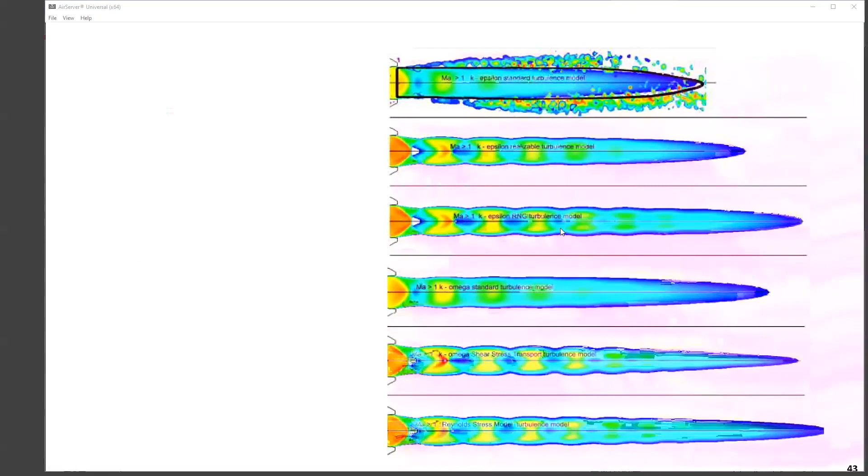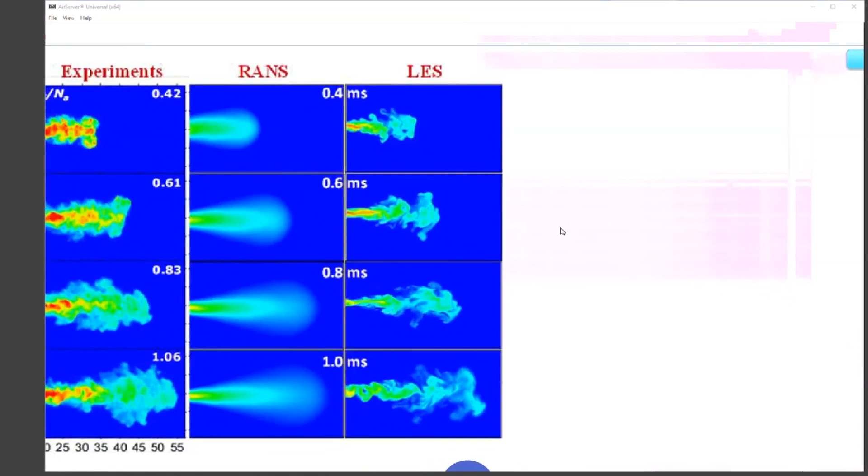You can see that the wake here, the wake length, they are different. That's one thing. And you can see that the properties within the flow are different for all models. So that's why it's important to understand, it's not just okay, use K epsilon for everything. No. Similarly, this shows the difference between RANS, LES, and experiment. Experiment, of course, we can see the exact behavior. RANS, this is the general shape, but you can see what is happening basically. So just to give you some perspective.

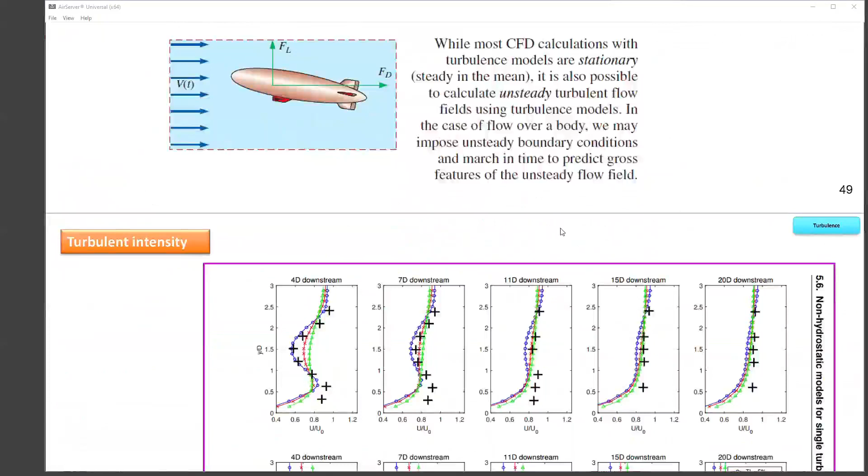Okay, I think that's all I have for turbulence model. Before we end our session, just one last thing. All right, so just to wrap up our discussion on turbulence model.

So have we covered everything in CFD? When we first started the semester, we looked at the CFD procedures, the ANSYS procedures in general, about meshing and the domain, then we moved to finite difference model, then a bit into finite volume model, and turbulence right now. So that's basically just a drop in the ocean about CFD. We have so many things we are yet to touch in CFD.

Some of the topics that we haven't touched, for example, that I put over here - and even this list is not comprehensive. This is just some of the topics related to CFD that are quite important but not covered as part of our syllabus.

For example, hydrostatic versus non-hydrostatic - what is hydrostatic? About grid generation, we did not really go into details. What is implicit, explicit scheme, open source - what is about open source? We did not go into details on that.

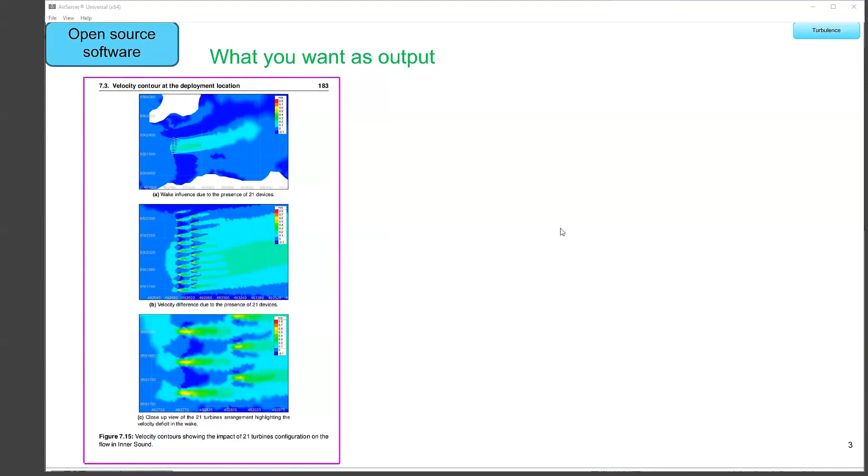After several years of study, along the way to get this, I had to write code, modify subroutines - I shared this last week. Open source is quite powerful because you can modify the behavior of the flow as you please. But because it's open source, it's free, so mostly you need to do some modification by yourself, some editing. Basically you need to come up with something - it's not just clicking one button and getting the result.

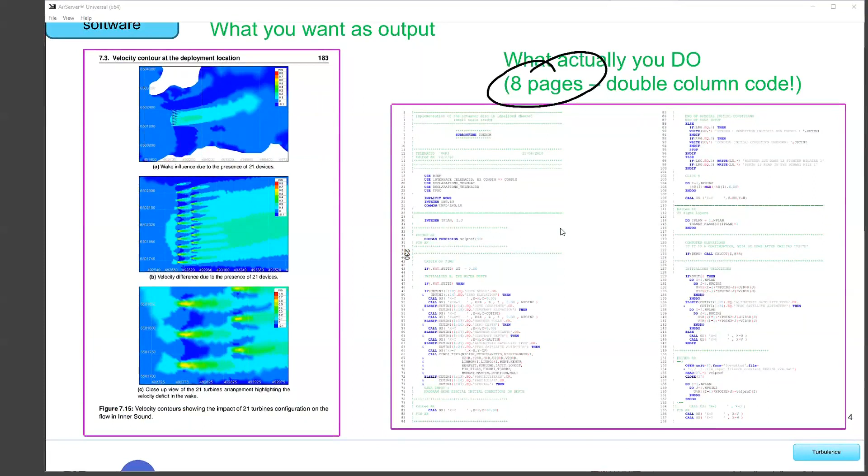I showed you that to get this, I had to make some adjustments to the subroutine. And of course, this is not just about the output that I want - it's about the journey, basically how I got from knowing nothing about the hydrodynamics of the ocean into producing something like this.

So I think that concludes our lecture for this semester. We covered basic philosophy or introduction to CFD at the start of the semester, and then in the second one, we went into hands-on detailed applications. We covered the theory, which is CFD procedures, and also looked into the use of the software during the lab.

And then for the third one, the fluid flow equations, which is the partial differential equations of fluid flow - this is a recap from your fluid dynamics course. We looked at how we derive the Euler and Navier-Stokes equations, and the importance of understanding how we get to those equations, not just the end product. We need to understand how the equations are generated, so we get the fundamentals behind them - how tau, sigma, pressure, gravity all come in.

Then we move into the discretization method. Remember, in the software, you try to replicate the physical problem, but you have to make some simplifications or assumptions from physical phenomena. So instead of looking at detailed mathematics, we look into something simplified - the function is converted into algebraic equations, something easier to solve. Discretization method means moving from one function into algebraic equations, easier for the software to solve. In this case, we looked into the finite difference model and also a bit on finite volume.